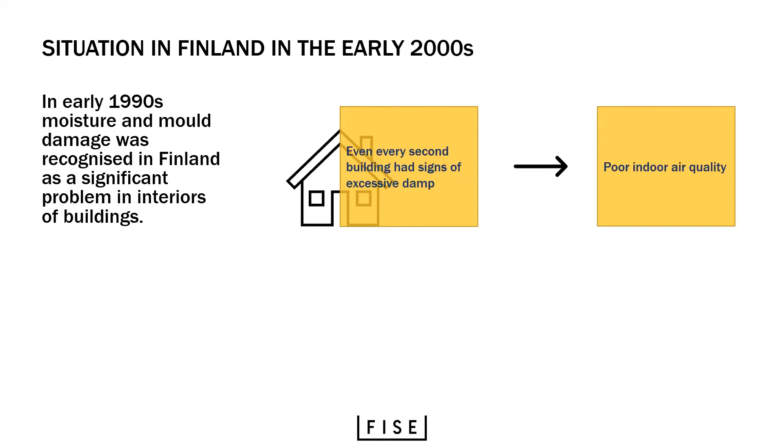In the early 1990s, moisture and mold damage was recognized in Finland as a significant problem in interiors of buildings. It was estimated that even every second building had signs of excessive damp, and in many cases that meant poor indoor air quality. It was estimated that every day about 750,000 Finnish people were exposed to significant moisture and mold damage. And that caused also health effects, and the level of health-related costs arising from moisture and mold damage were about 450 million euros per year.

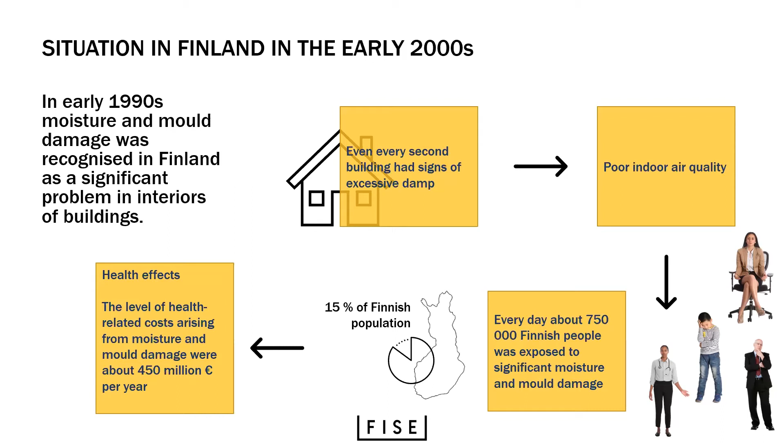And because of these problems, in 2009, our government decided to launch an action plan to stop moisture and mold damage. And a project called Moisture and Mold Program started in 2009 and ended in 2015.

And as a part of this moisture and mold program, a project called Special Troops of Healthy Buildings was carried out. And the first task in this project was to evaluate the situation in the field of competence of experts.

And the discovery was that no standardized qualification requirements existed in Finland. Experts had either competence in indoor climate or structures. There were also so-called experts who didn't have competence in either. Some trainings were available and also voluntary registration of some experts.

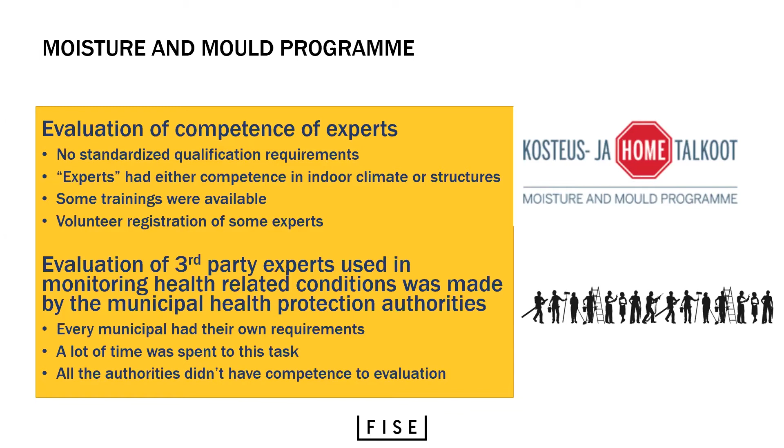In our Health Protection Act, there was a possibility to use third-party experts, and this was added to the Act in 2001. And the evaluation of these third-party experts used in monitoring health-related conditions was made by the municipal health protection authorities. And there were problems because every municipality had their own requirements, and a lot of time was spent on this task, and not all the authorities had competence for this evaluation task.

And after mapping the current situation in this project, Special Troops of Healthy Building, it made in 2013 recommendations for organizing training and qualification for the moisture and mold damage sector in Finland.

And most of these recommendations were transposed into law in 2014. First, the Land Use and Building Act was renewed, and a new special field was added there: repair work of moisture damaged structures. And also qualifications for designers and site managers of repair work of moisture damaged structures were added there.

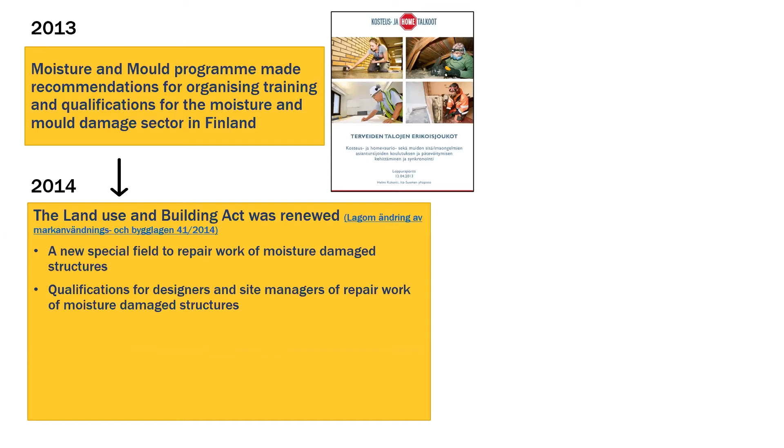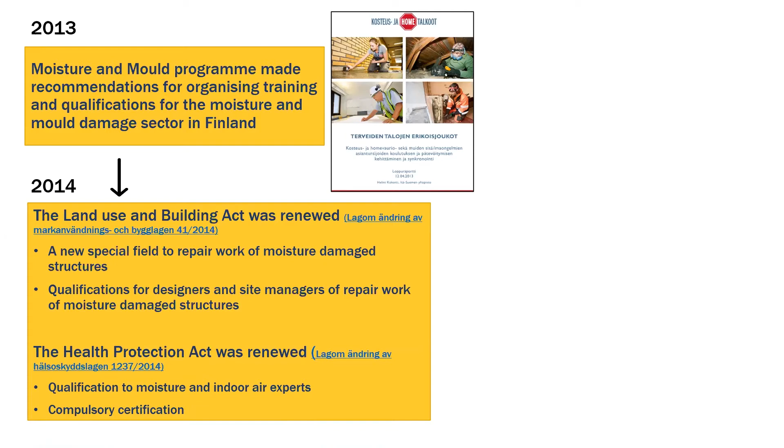And then the Health Protection Act was renewed, and qualifications for moisture and indoor air expert were added there. And for these experts, compulsory certification was also added. And in 2015, certification organizations established new certification schemes for repair work of moisture and mold damage.

And we in FISE have in our system designers and site managers, which come from the Land Use and Building Act. And then we have building investigator of moisture damaged structures, which comes from the Health Protection Act. And another certification organization, Eurofinns Expert Services, has building health experts and indoor air specialists.

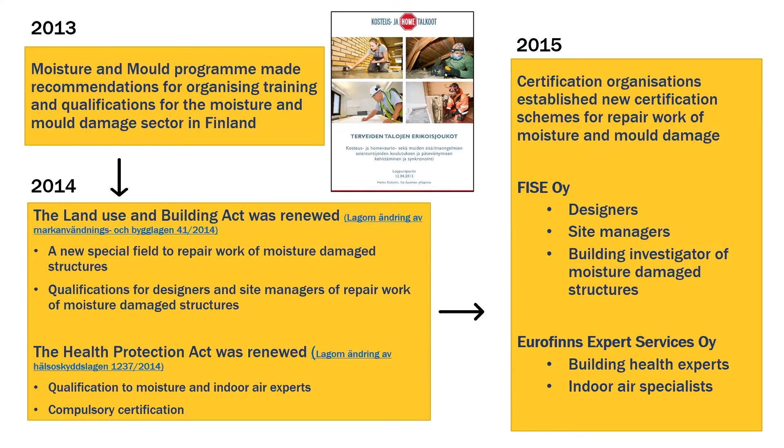The certification requirements are shown in a decree of the Ministry of Social Affairs and Health. This decree can also be found in Swedish if you follow this link here. But next I will shortly present the certification requirements in English.

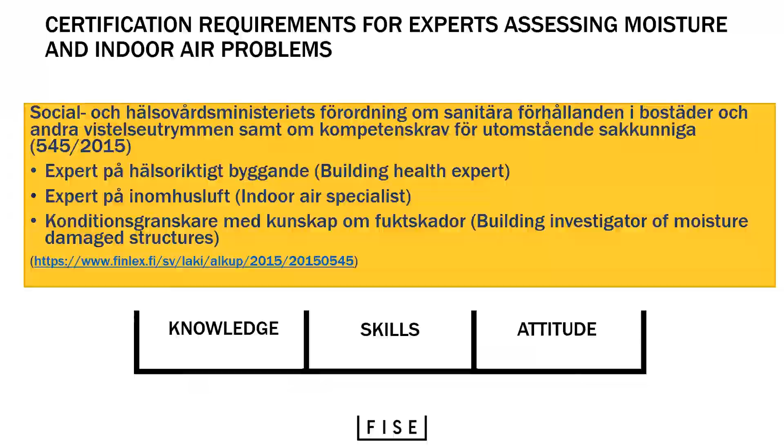First, the certification training. This is required for certification, and the training consists of 3 modules: indoor environment module, building physics module, and ventilation module. There are 3 experts, and each has a little bit different amount of credits in each module.

For building investigator for moisture damage structures, the largest module is building physics, which is 17 credits, and this is altogether 27 credits. They don't make a large thesis, but they make a building investigation report of a real case. Indoor air specialists have 25 credits altogether, and the largest part is indoor air environment. They also make an indoor air investigation report of a real case as a thesis or project work.

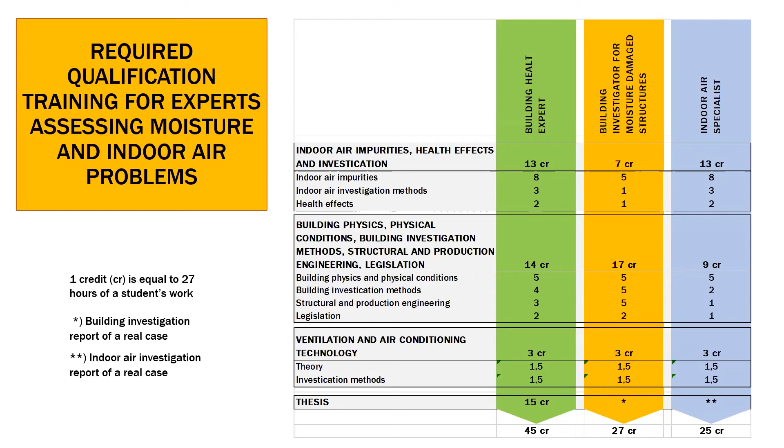After a person has completed this training, he or she can apply for certification. The certification requirements consist of 3 parts: the degree, work experience, and qualification training.

The degree can be for building health expert from the construction branch, or from natural sciences, environmental sciences, and environmental health. For building investigators, it must be from building and construction branch, and for indoor air specialists it's a higher or lower academic degree in natural science, environmental sciences, and environmental health.

All experts must have a minimum of 3 years of research task related to the condition of buildings and health hazards in buildings.

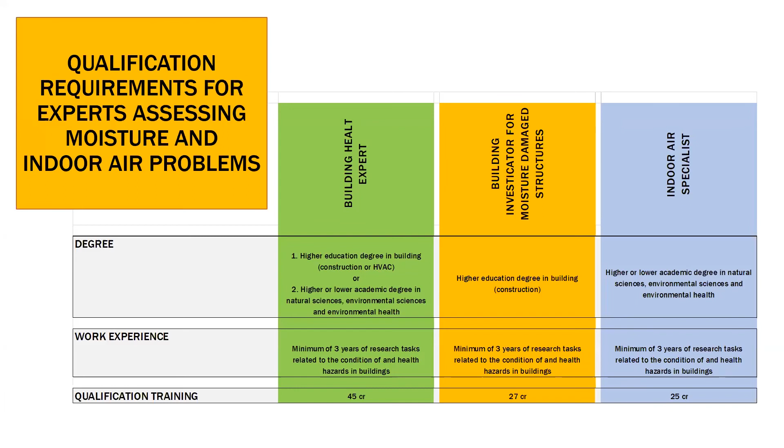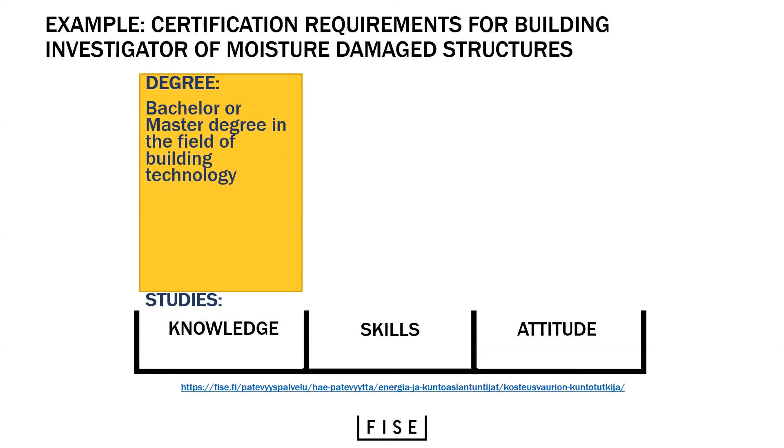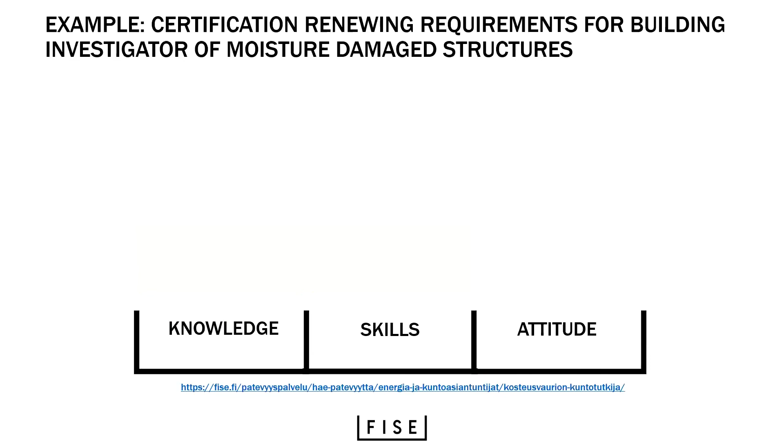Then there is the qualification training, which is a little bit different for each certification. Because we at FISE have the certification of building investigators, I have put it here a little bit more accurately, but I think we don't have so much time to go through it precisely, so you can check it afterwards from this presentation. Here are also the renewing requirements for this certification.

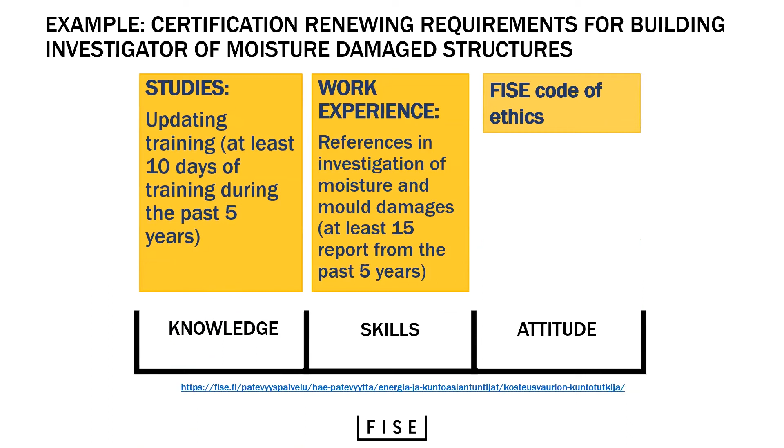So what are our experiences so far? We have 7 training organizations giving certification trainings. We have altogether 431 certified persons in our and Eurofinns' registry. The largest group is building health experts, but the amount of building investigators and indoor air specialists is getting higher all the time.

We also have voluntary certifications for other experts who do tasks in indoor air problems, for example building investigator in ventilation systems. A lot of new information has been produced in training programs. Of course, many theses have been made, and training organizations have also developed their trainings.

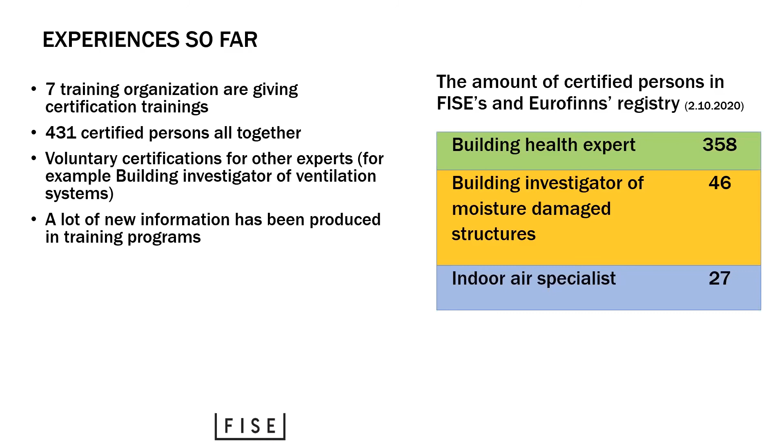Health protection authorities can use certified experts in assessing health effects, and nowadays it's very common that they use these third-party experts. Private clients demand certified experts in their offer requests nowadays. Expertise has also increased among municipal health protection authorities - many of them have carried out this certification training also.

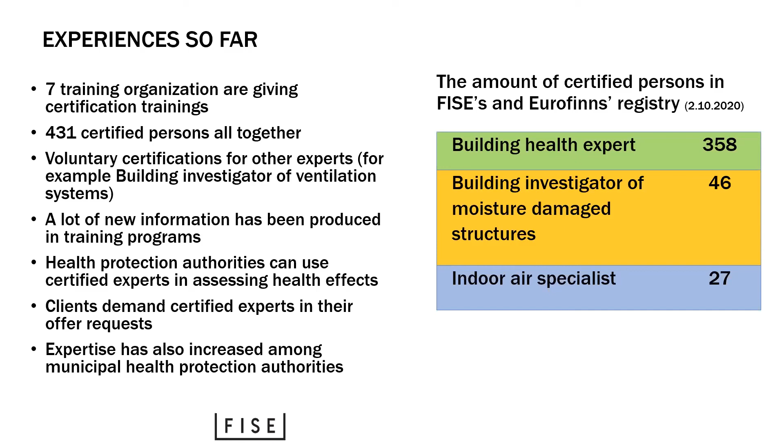No, we are not out of the woods yet. We know that these changes need a lot of time and a lot of effort. I saw here some key things that are now under development in Finland.

Sharing of good practice could be better. Development of investigation methods is going on, especially indoor environment investigation methods could be better. Dialogue between ministries must be good. We have some legislation renewing going on right now, and it's very important that legislation is uniform.

The management of entities could be better. Big clients manage this very well right now, but on a large scale there are many things that could be better - for example, better use of research data in renovating design.